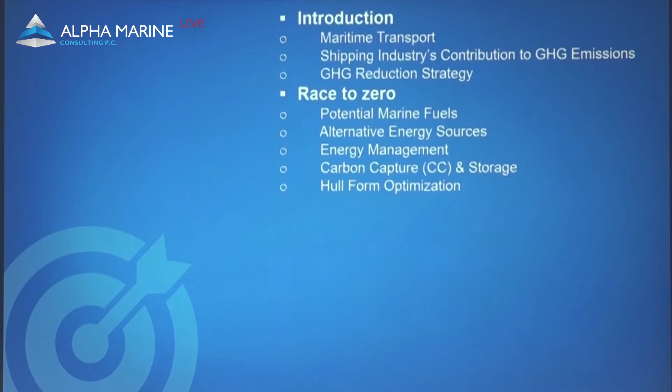Ladies and gentlemen, I would like to thank you also very much for attending this presentation. As Mr. Yerasimou already explained, today we are going to discuss the importance of the maritime industry, its contribution to greenhouse gas emissions, and all available and emerging decarbonization technologies. A striking example of this is the feasibility study on an Aframax tanker, on which we implemented different decarbonization technologies with the main aim to assist the ship owner to prepare for the upcoming regulations. The results and the case study itself will be further analyzed by Dr. Wu from University of Birmingham.

Without doubt, the shipping industry is the backbone of the global economy. For the maritime industry, this is not just a moment of change, it's a time of transformation. Never have the decisions we face been so complex, and never have the consequences mattered more. We all have to be united under the common goal of a carbon neutral tomorrow. However, to get there, decisions from vessel design to fuel choice need to be taken today, while cross-sector regulations and international collaborations will enable us to shape a brighter future.

It's not about ensuring future compliance or competitiveness. It's bigger than that. It's about shaping the future for the maritime industry, for our people, and for the world we are living in.

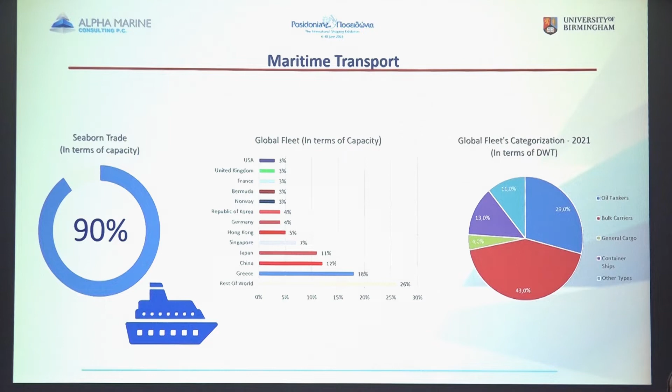And at the same time you can see on the right diagram that bulk carriers and oil tankers represent about 7 out of 10 vessels globally. Also, LNG carriers and container vessels are a very promising and booming sector. The last decade, shipping industry has been developed approximately by 67% and 3% compared to 2020.

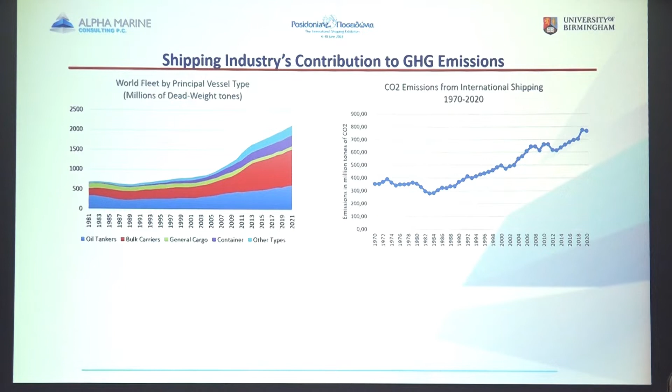That means that as the shipping industry development increases, it generates increasing emissions. And this can be clearly seen on the right diagram again, where shipping industry emitted about 762 million tons of CO2 in 2020. Nowadays, shipping accounts for approximately 2.2% of global greenhouse gas emissions, and these emissions are expected to increase further by 51% in 2050.

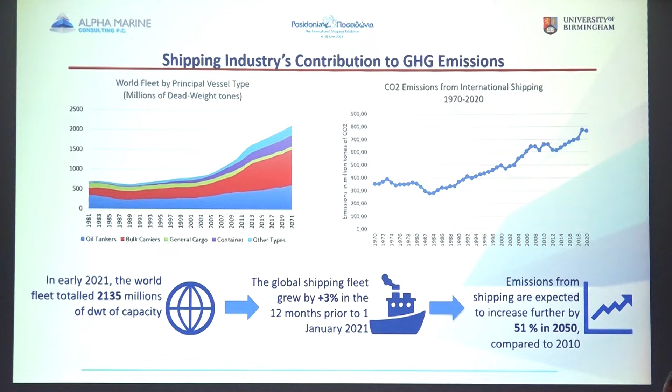It doesn't matter if we want an iPhone coming from China or a coffee from Mexico, or even to just tow an iceberg to Glasgow. At the end of the day, we all depend fundamentally on the shipping industry. And this just underscores the importance of decarbonizing the shipping sector.

Now, let's find out which technology or fuel could drive shipping emissions to zero. This is the question of this age, and for sure the question of the next decade. Deciding on the most appropriate solution depends on understanding the vessel's operation, safety of carriage, handling and storage, and availability at ports globally. At the same time, we need to ensure that we can deliver to the shipping industry a safe, scalable, and commercially viable solution.

There are several ways with which we can achieve high efficiency and compliance for our vessel. You can either switch to low carbon or zero carbon fuels. You can use technologies utilizing alternative energy sources like wind, sun. You can install a carbon capture storage technology, which is still under development. And of course, you can choose technologies that could potentially optimize the hull performance and the energy management of the vessel.

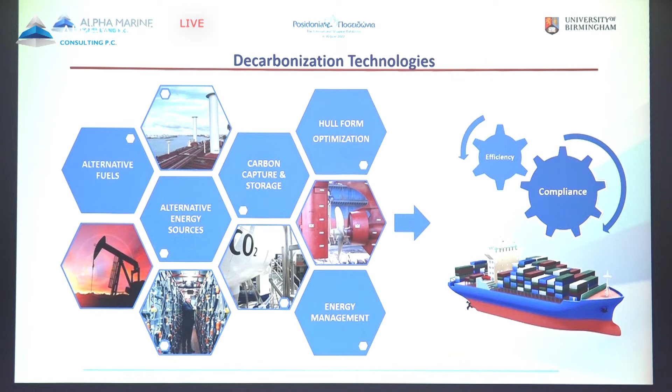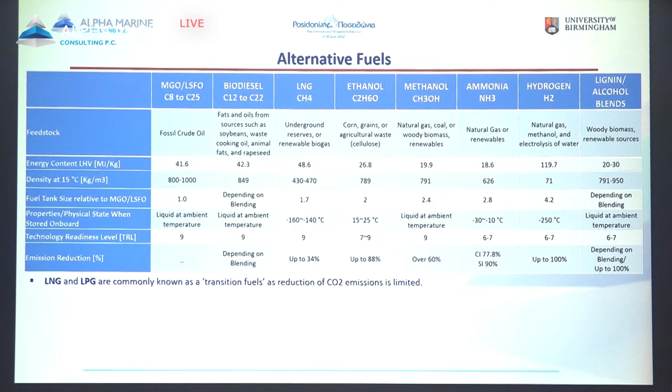So, firstly, we would like to give you an overview of the most important alternative fuels. LNG and LPG are commonly known as transitional fuels nowadays, since the reduction in carbon dioxide emissions is limited. We can achieve up to 100% reduction in greenhouse gas emissions when ammonia, hydrogen, and methanol are used in thermal engines or fuel cells.

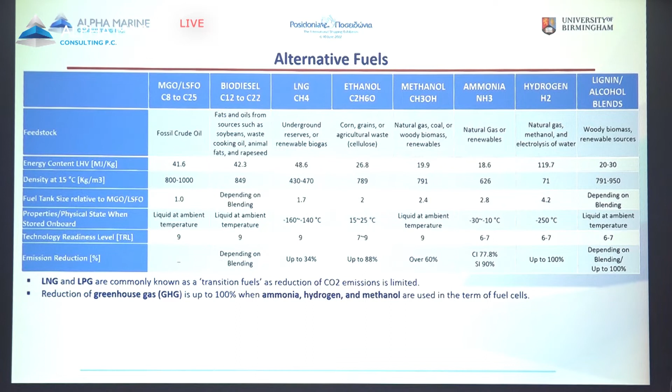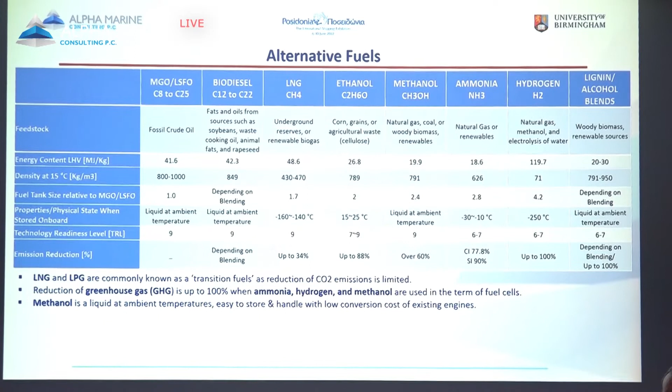Methanol is a liquid almost similar to the conventional marine fuels, which can be easily stored and handled on board. It has potential, however, it needs more space in the market, and we need to accelerate this solution. Limited by the storage standards, hydrogen and ammonia are not commercially available alternative fuels, but with high potential.

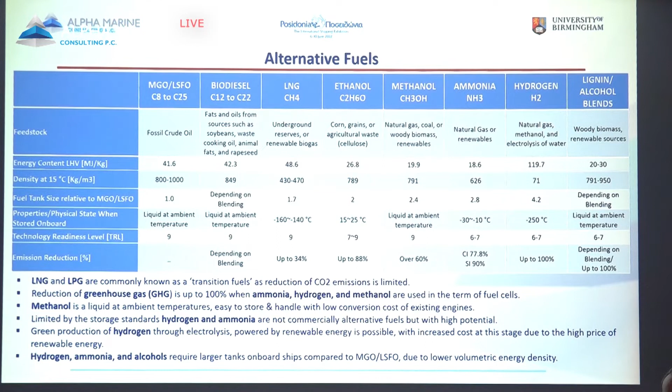Green production of hydrogen through electrolysis, powered by renewable energy, is possible, however with increased cost at this stage due to the high price of electricity coming from renewables. Lastly, hydrogen, ammonia, and alcohols require larger tanks compared to conventional marine fuels.

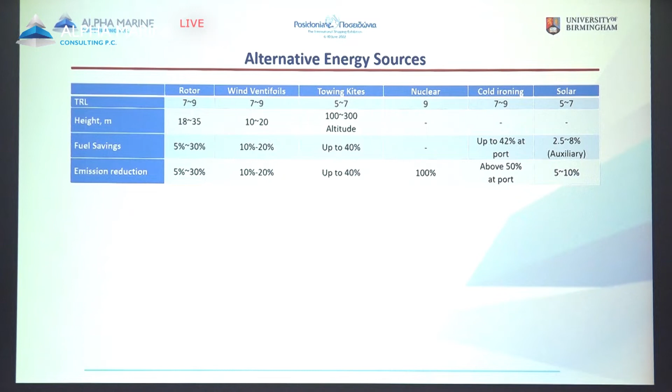Secondly, let's focus on the group of technologies utilizing alternative energy sources. Rotors, wind ventifoils, towing kites are some of the technologies using the wind, having very high TRL level. However, the reduction in the fuel consumption and in the emissions depends on the vessel type, the size of the installed equipment, and the operations.

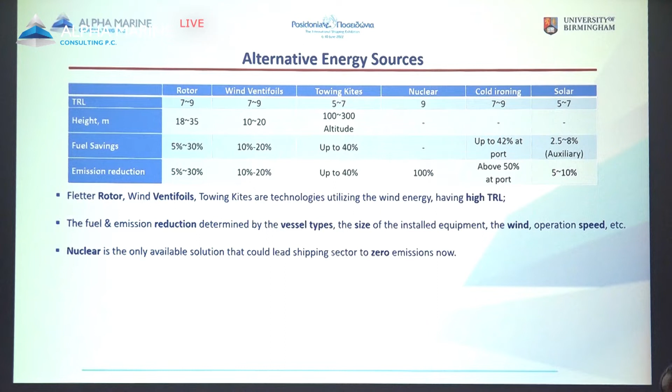Nuclear is nowadays the only solution that could lead the shipping sector to a carbon neutral future. However, radioactive waste disposal, and accidental release of radioactivity are the main reasons why nuclear power has not yet been adopted in the maritime industry, especially in commercial merchant vessels.

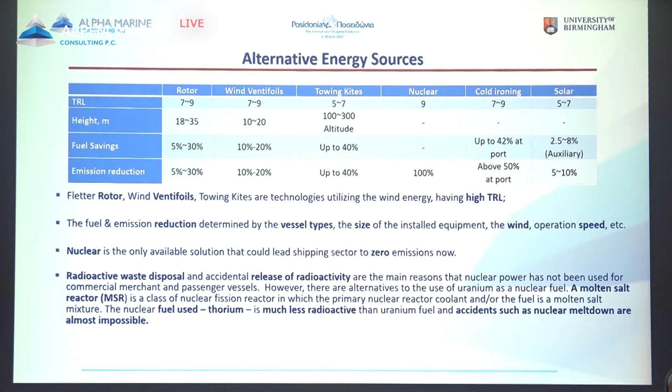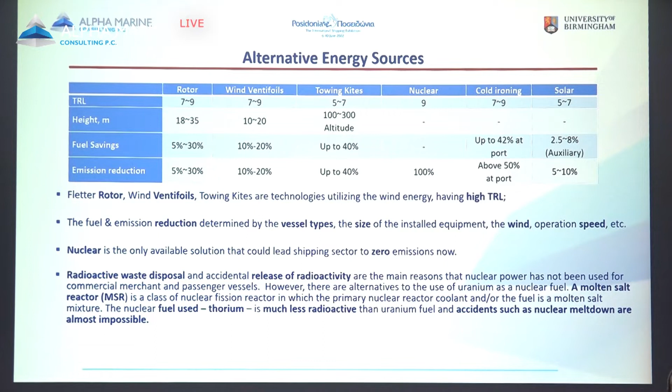Of course, there are alternative solutions instead of using uranium as a nuclear fuel, and this is a molten salt reactor, which uses a fuel that is much less radioactive, and accidents such as nuclear meltdown are almost impossible.

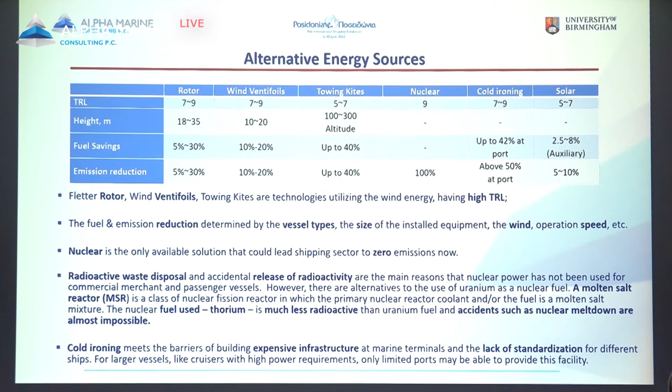Cold ironing is another promising solution. However, the expensive infrastructure and the lack of standardization are some of the main disadvantages. For larger vessels like cruise ships that require high hotel loads, only limited ports can provide this facility.

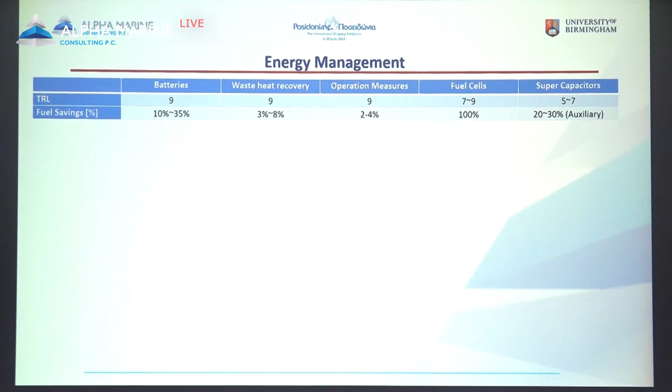Then let's consider another group of technologies that aim to optimize the energy management of the vessel. Batteries can potentially reduce fuel consumption and emissions on board a vessel. However, the increased cost and the complexity of the system are the main disadvantages.

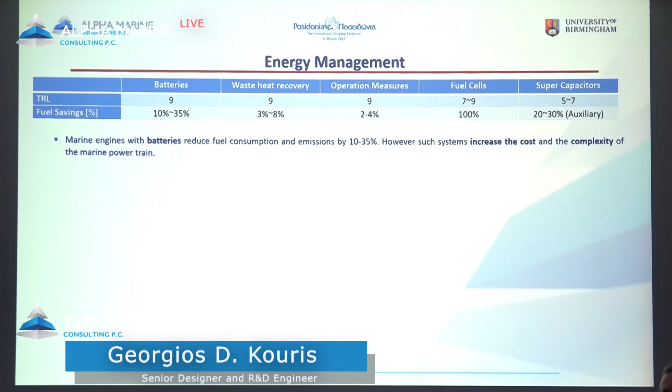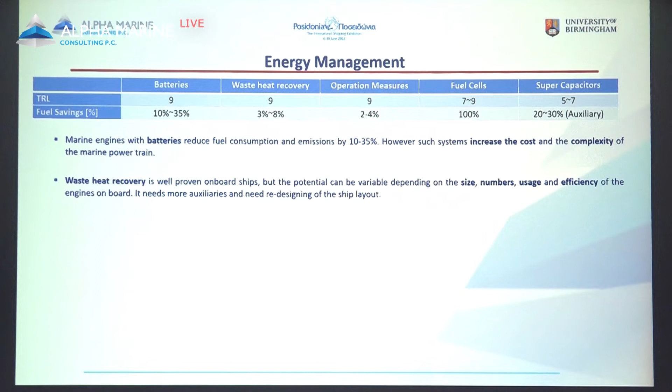Waste heat recovery is also another solution well proven nowadays on board vessels. However, the usage of this solution in the maritime industry depends on the different size, numbers of engines, and the efficiency, of course.

Operating at a low speed, slow steaming, optimizing the route and the trim of the vessel are some of the operational measures that could lead to fuel savings and reduction on emission. However, this solution cannot lead the shipping industry in the decarbonization.

Fuel cells, when powered by hydrogen, are fully renewable and can provide clean power. However, in this solution we have problems like availability of hydrogen fuel, and of course we need to increase further the manufacture of fuel cells.

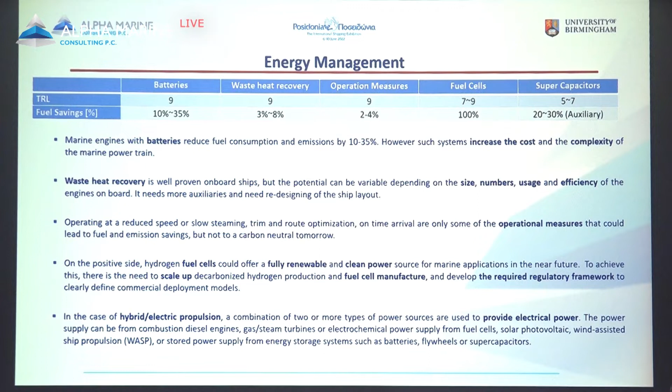At the end of the day, we can also end up with hybrid and electric propulsion configuration in order to provide electrical power for our vessels. In this solution, we can combine combustion diesel engines, gas steam turbines, electrochemical power supply from fuel cells, for example, and wind assisted propulsion. Or even energy storage devices like flywheels and supercapacitors.

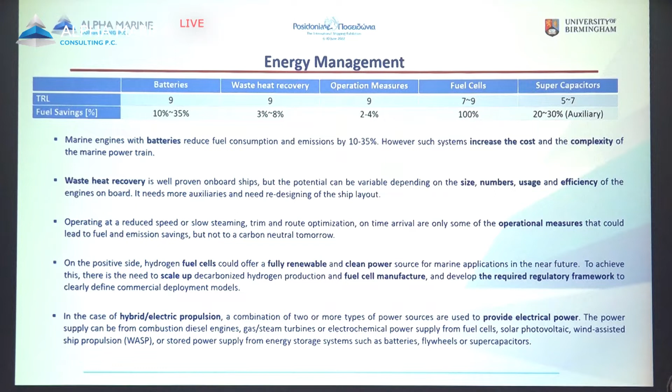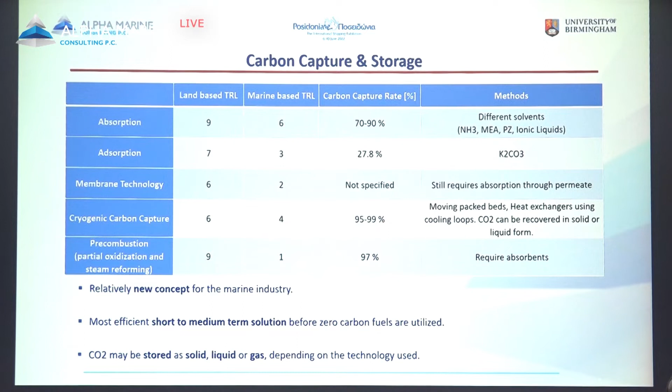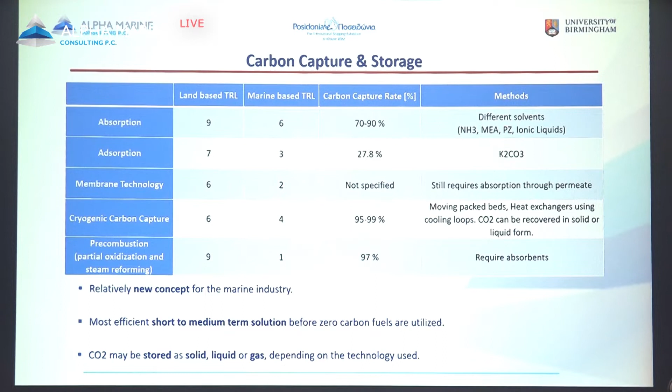So, last but not least, I would like to discuss technologies that aim to capture the carbon dioxide on board the vessels. These technologies have low TRL level for maritime applications. It's a new concept for the maritime industry and can be considered as a short, medium-term solution that will meet the upcoming regulations and requirements until zero carbon emission fuels can be utilized for the shipping sector. And of course, with carbon capture technology, the carbon dioxide emissions can be stored as solid, liquid, or gas, depending on the technology used.

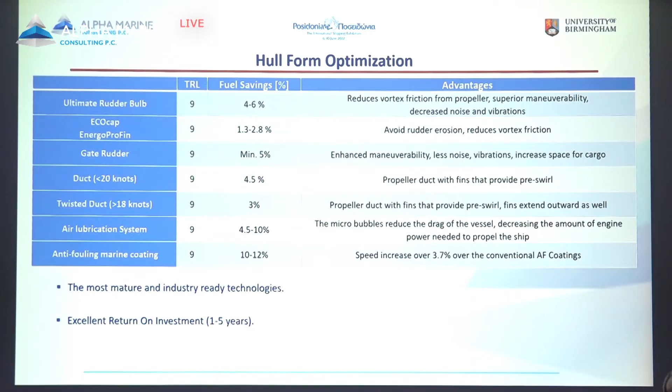Finally, let's deal with the technologies that aim to optimize the hull performance of the vessel. These technologies have a high TRL level, are already implemented in maritime industry, can have excellent return on investment for the ship owners, and of course we can achieve potential savings.

Now, to sum up, I would like to go back again to the question, which solution do you think will drive shipping emissions to zero? The simple fact is that at this stage, and as we stand now, there is no silver bullet or immediate answer. The solution lies in a range of technologies working together. And this is what Alpha Marine Consulting has proved during this study in collaboration with University of Birmingham, the results of which will be further analyzed by Dr. Wu.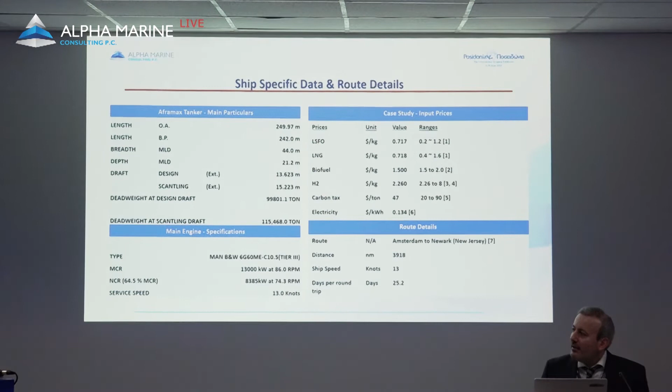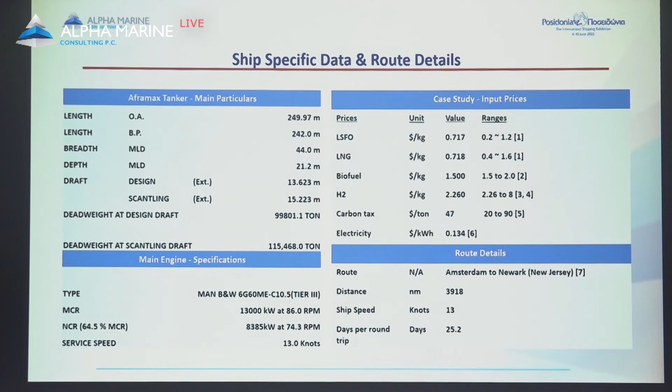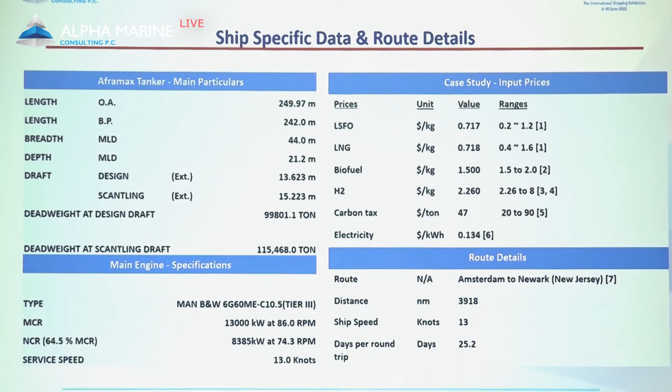So this is the ship specifications. You can see the length 250 meters and then the breadth 44 meters. That you know very well. And the deadweight is 115,000 tons. And the engine you must be very familiar with, that's a MAN engine, and the MCR is about 13,000 kilowatts, and there are also 3 auxiliary engines, and the design speed of this vessel is 13 knots.

And we have lots of inputs into this case study, especially the price. You can see the price for LSFO and the LNG over there. The price currently is very volatile. So we decided to apply a very large range to do the sensitivity analysis. So you can see the LSFO up to actually 1,200 US dollars per ton. And the LNG actually goes up to 1,600 US dollars per ton. That's the price after the war. And we understand the biofuel is also very expensive, so we apply quite a large range on it.

Pounds per kilogram, so which is still very, very expensive - that's from renewable energy, so still very expensive. The carbon tax we apply here is 47, based on the April 2021 data from the EU.

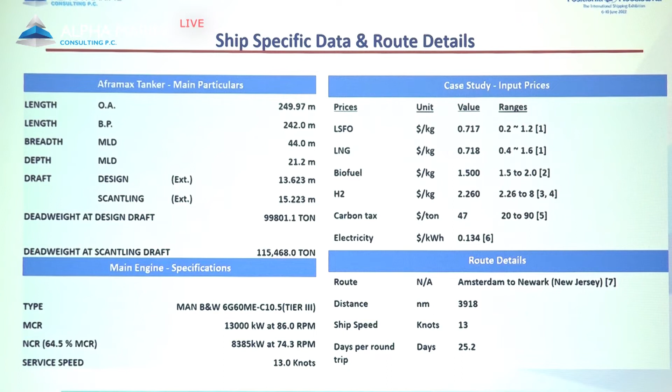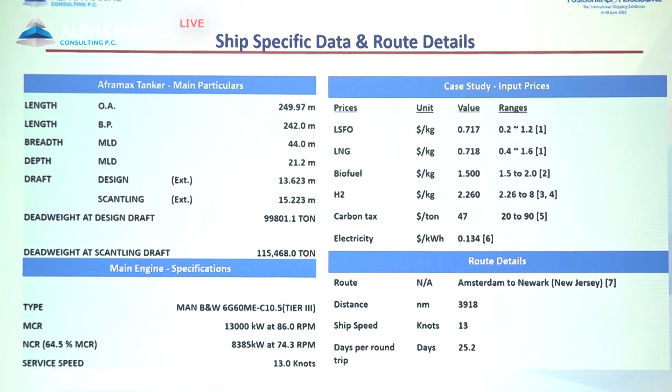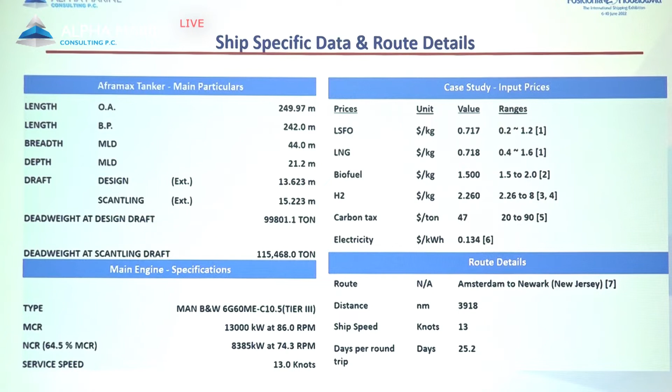About routes, we understand obviously the tanker can go anywhere, but we just want to make a particular case, which is from Amsterdam to Newark. So we look into the operational data, we understand the distance of this voyage, and we apply the ship speed of 13 knots on it. The average travel day of each trip is about 25 days, so roughly this ship traveling on sea is about 230 days a year, and the rest of the time, about 130 days, which is staying at port doing the cargo operating or just waiting. Very detailed information about this.

Then we look into the configuration. George already did a very comprehensive review of what kind of technology we can apply onto the system. But if we really look into all those technologies, the question is, does the system need to be so complicated?

If we look into this system, we can apply lots of different decarbonization technology into it. For example, you can apply a dual fuel engine, you can apply biofuel into your main engine. For the auxiliary engine side, the hotel load side, you can do battery, you can apply fuel cell. You also can have some load that could help you reduce the fuel cost. For example, you can install a Flettner rotor, which will use some electricity from your auxiliary engine side, but it will help the propulsion side a lot.

And also you can apply air lubrication - again it will consume some electricity from your auxiliary engine, but it will reduce the friction, so help reduce the fuel cost on your propulsion engine side. You can see a very complicated system here - that is carbon capture and storage, which is a very hot topic, lots of people talking about it at the moment, so we also look into that. But is the whole system necessary to be as complicated as that?

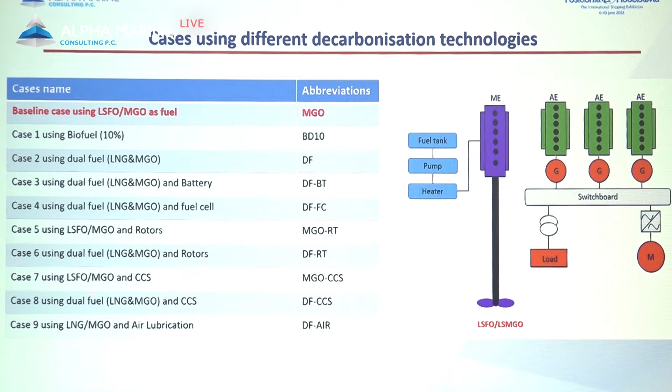Then the last 3 cases - case 7 and case 8 - we're talking about some technology for the future. The first one is we use CCS, carbon capture and storage, with a diesel engine. Then case 8 is CCS going with a dual fuel engine, so we could understand how much carbon we can capture on the vessel. The last one is a dual fuel engine with air lubrication, which is also available on the market.

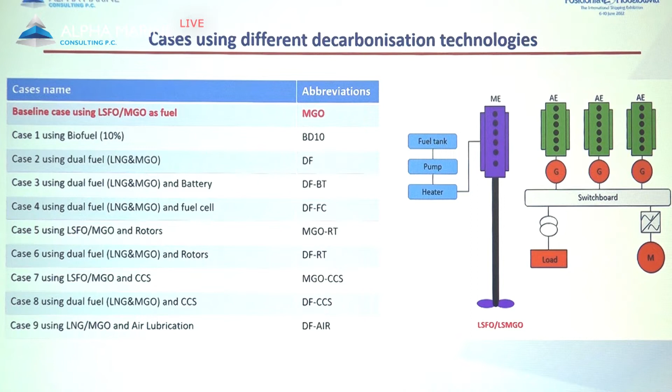Okay, let's have a look at the detailed cases. I'm trying not to overwhelm you with detailed information, but we can look into this base case.

The thing we can understand is about 80%. I have to say one thing beforehand: this is the CapEx, but it's only about the powertrain system. So it's not including the shipbuilding, everything else. It's just about the powertrain — everything that generates power for propulsion or for auxiliary purposes. We include that in this CapEx, not everything.

The main engine and auxiliary engine in total take about 80% of the CapEx of this tanker, and the fuel storage tank takes about 14%. If you keep those numbers in mind, then we move on to look at how the other cases compare with the baseline one.

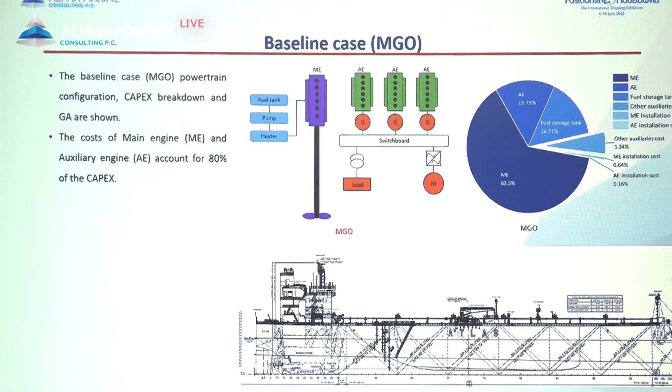Then move on to the next one, the dual fuel case. Interestingly, in the dual fuel case you can see the fuel storage tank cost overtakes the auxiliary engine and becomes the second place — so you need to make some investment there. Looking at the GA, AMC has already designed this kind of LNG-ready ship, so you can see where to put the LNG storage tank on board.

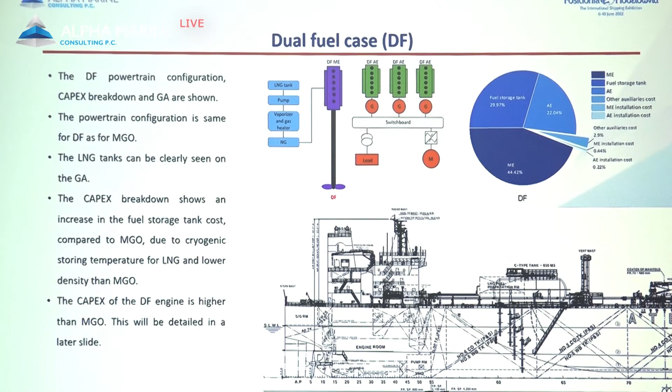Okay, the next one — we're looking at involving a battery in this powertrain. We cannot install too big a battery; we're only trying to use the battery to help with cargo operations. So this battery is about...

16,960 kilowatt hours. To give you a more familiar idea: at peak time it can generate about 1,800 kilowatts of power to help, but that power won't last long because the energy stored in the battery is limited — you can sustain that peak power for about 9 hours.

Obviously, cargo operation at port is probably more than 2,000 kilowatts, so you won't only use the battery to serve that purpose. You'll obviously have the engine working for that base power demand, and the battery helps the auxiliary engine during cargo operation.

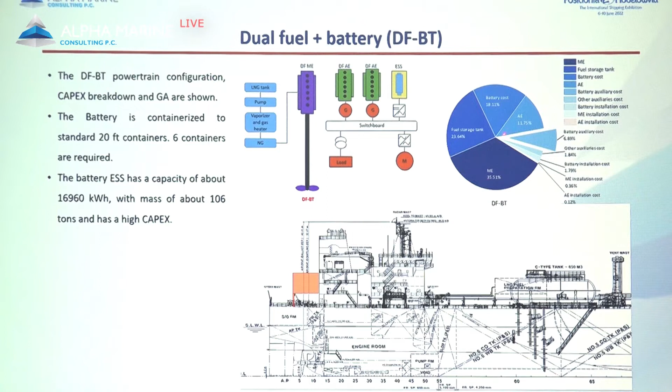But even in that case, the battery takes a lot of space — about 6 container sizes to deliver that job, and its weight is 106 tons. Looking into the CapEx table, the battery cost takes almost 20% of the powertrain, apart from the marine engine and the auxiliary engine. So let's look into the other case about the fuel cell.

So for the fuel cell, we apply something very similar to an engine — about 800 kilowatt output, so basically it works as the auxiliary engine. The difference between fuel cell technology and the auxiliary engine is that the fuel cell cannot respond to demand very quickly. If you want to increase the power output from the fuel cell, you're talking about a couple minutes delay at least. But in terms of size and volume, the fuel cell is much smaller compared to the battery bank.

So if you need this 800 kilowatt fuel cell on board, you only need 1 container size, which you can put here to support your whole system. And there's a downside of using the fuel cell, which is the hydrogen storage — the hydrogen storage tank is currently very, very expensive.

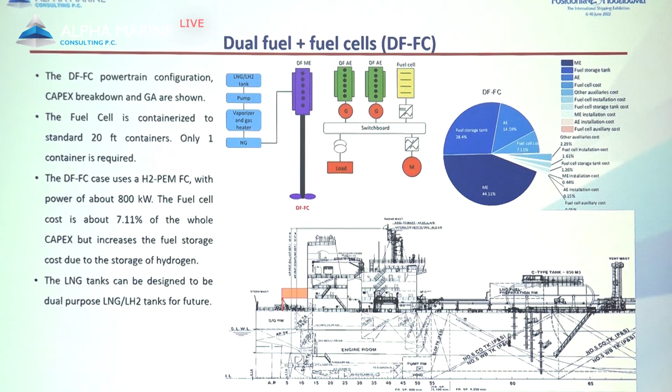We have some cost figures in the later slides. So even though you only supply this one fuel cell at about 800 kilowatts, you're still talking about major investment into your fuel storage tank. Then you can see your fuel storage tank CapEx increase to almost 30%, close to it.

Okay, the next one is using the rotor alongside the powertrain system. In this case, we install 2 Flettner rotors onto the deck.

Obviously, this is the diesel engine, so potentially we don't have the LNG tank on the deck. So we can even install 3 rotors on the vessel, which can contribute more to the decarbonization. But we want to compare the diesel case with the LNG case, so we still install 2. Remember that for the LNG case, we have the storage tank on board.

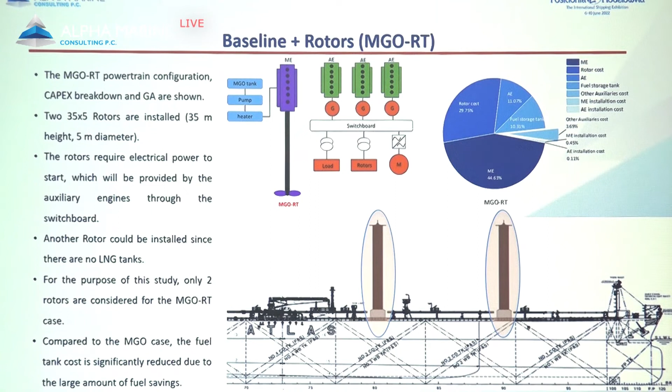Looking at this case, you will find that you can install 2, 35-meter tall and 5-meter diameter rotors onto your deck. Looking into the cost, it's not cheap, it takes quite a lot, 30%. But this is the relative value, just broken down to the percentage. If you look in the next slide at the absolute value, it's still a decent investment after our research. This is the 2-rotor case without the LNG tank.

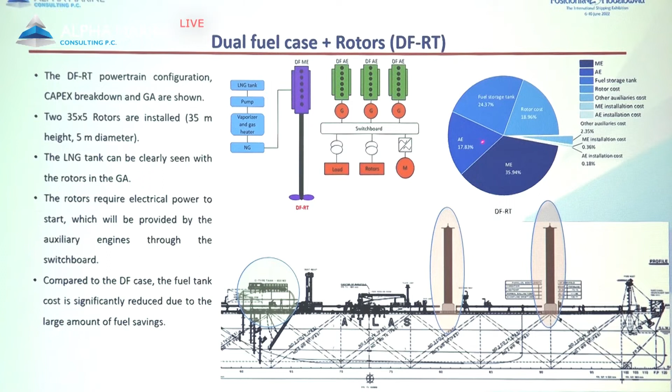The next one is the LNG tank with the 2 rotors. Very similar setup, the only thing is this is the LNG engine, so the cost and the LNG storage tank will take some share from this capex pie.

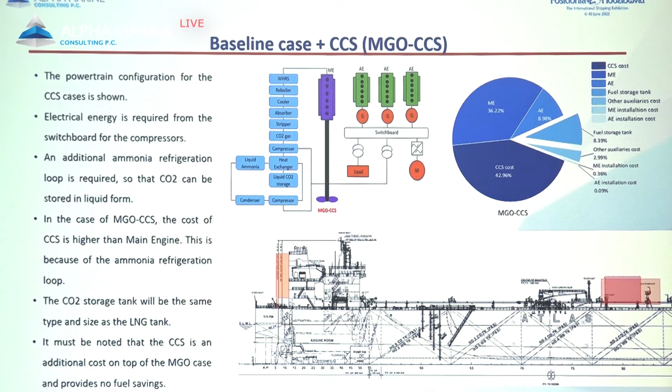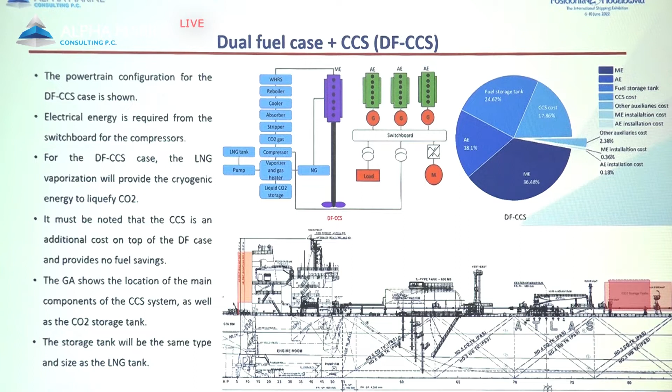But if you go to the next case, which is the dual fuel case, you would be able to use the cryogenic energy from the liquefied natural gas, because when you use LNG you need to evaporate it, so lots of cryogenic energy will be released.

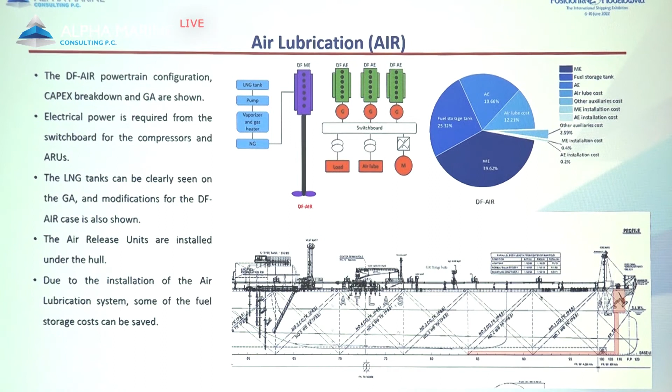Okay, I hope I haven't overwhelmed you with all this boring technology. Let's go for the cost, which I think is what you're really interested about.

Let's look into the CapEx comparison of all these powertrain designs. We tried to hide the supplier information, so we normalized the cost. The MGO is the baseline case, we just make it unit one. So the rest of the cases will all have a higher cost compared to the baseline, which is quite easy to understand.

The BD10, which is the biofuel case, you just need to slightly increase your cost. But we'll understand later that your fuel cost will dramatically increase due to the biofuel supply and cost.

The other information you can get from this diagram is like the battery and the fuel cell. You're talking about very high cost adding this system onto your powertrain, although it won't take too much share of your auxiliary power. So there's lots of things you can see.

In terms of the rotor, the investment is moderate, but we will find later if it brings any benefit for your fuel cost and other costs as well.

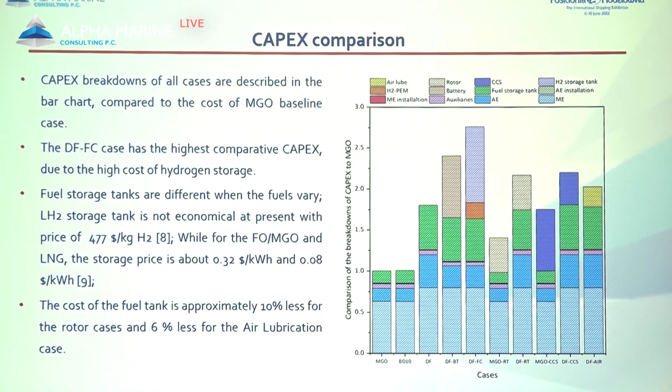Okay, let's look at the next one. This is the total cost. When you're adding the fuel cost on top of the CapEx, everything, you will see the cost over 25 years just soar up to a very high level. Looking at these two rotor cases, you'll understand that the rotor really helps you a lot in terms of cost saving over 25 years.

And these red bits, they are REPLEX. So when you're using battery or CCS, you're talking about not only the initial investment, you're also talking about some replace cost during the lifespan of your vessel. So this also needs to be considered.

On the left-hand side, this diagram shows you that currently there's no carbon tax applied yet. So when thinking about the carbon tax on top of the current total cost over 25 years, you will see those red-orange bits on top of it. The size of this carbon tax column depends on how much carbon dioxide emission comes from your system. Again, the two rotor case gives you a very good total cost over 25 years.

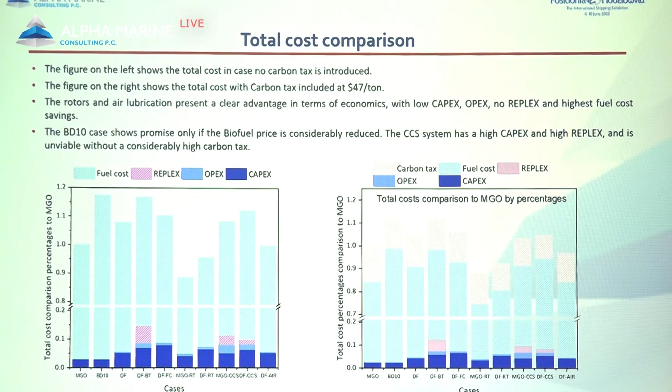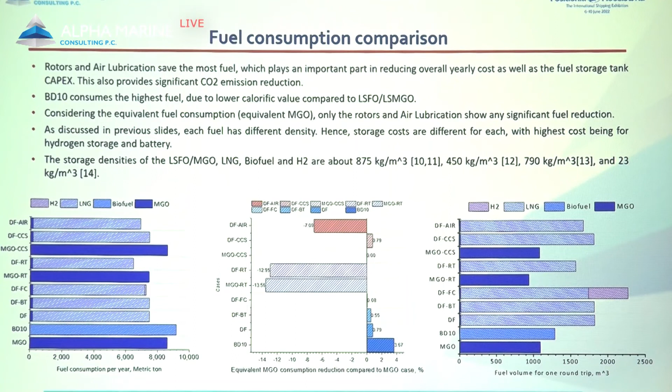This gives you some information, but not really complete, because the density and heating value of those fuels are not exactly the same. For example, hydrogen is very light, so you only see a very small bit here. But we need to look at the other side of this information.

So we do the equivalent MGO consumption - we convert all the fuel consumption into MGO. Then we can understand very well which case saves a lot of fuel cost. On this side, we find two rotors really save a lot of cost, and the air lubrication also helps us save. But the rest of the cases, like biofuel, actually show an increase.

On the right-hand side, you have the fuel volume for one round trip information - that's also crucial information. The hydrogen I'm talking about takes a lot of space, so when you're looking at the volume of your fuel tank, that will increase a lot.

Okay, then it's the payback period and the levelized cost of electricity - two criteria that help you judge which one gives the best economic viability. On the left-hand side, the baseline, you're talking about 8 years for the payback of this powertrain system, not the whole ship. But when you look at other systems with added technology, you'll just prolong the payback period a little, not too much. But when using battery technology or biofuel, you're potentially looking at very long payback periods.

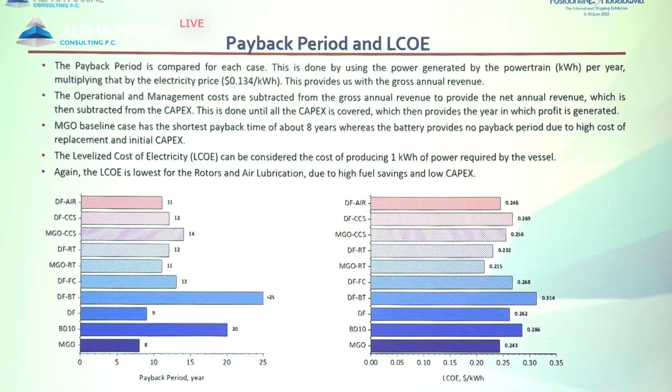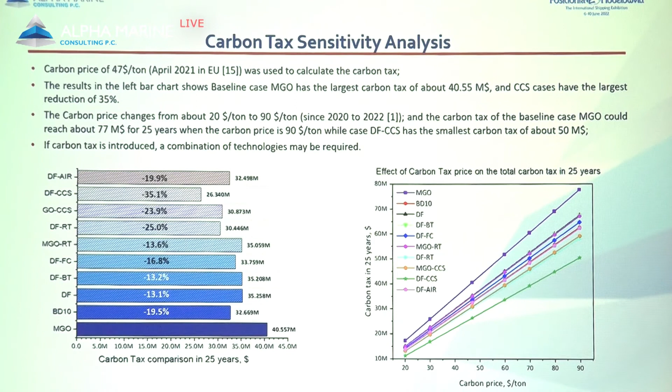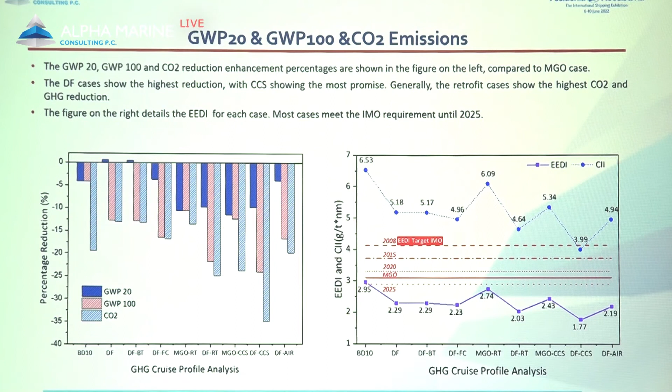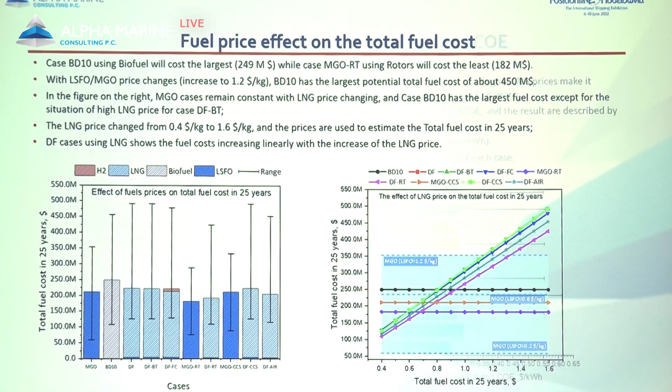Okay, so I think I probably skipped a couple slides to reach our conclusion. So the message we want to pass over to you is that, looking at the CO2 emissions based on different cases, most of the cases we propose here will be in compliance with the IMO's reduction strategy until 2025.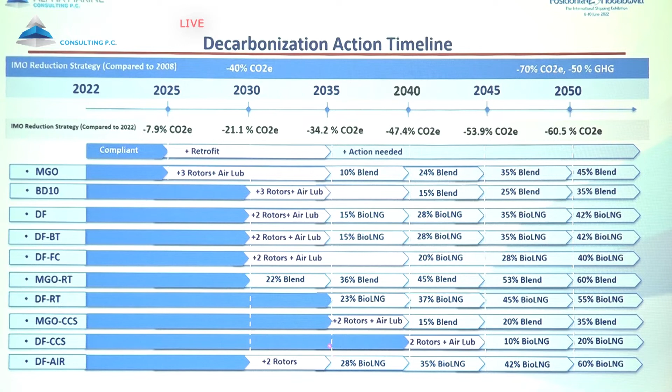But if you're not taking any action for the MGO baseline case, after that you have to do some modification on your current vessels. Other cases, like biofuel, dual fuel, or adding battery, fuel cell, or rotors, can reach 2030 - a moderate modification that allows you to extend compliance until that time. Then CCS obviously shows very good compliance with the IMO strategy, but the problem is that the cost is really, really high.

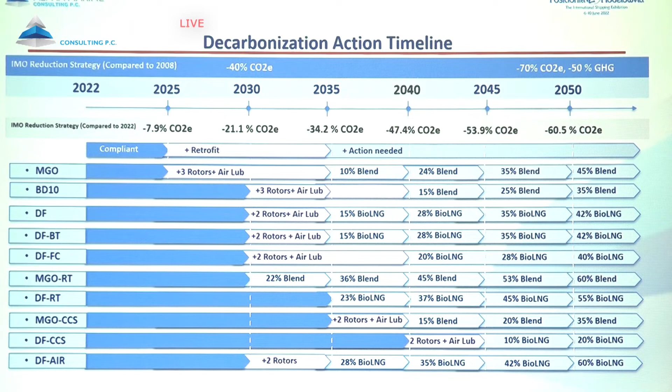Let's just conclude our slides. Firstly, the baseline case will not be in compliance with the IMO strategy as early as 2025. The dual fuel case achieves carbon reduction which follows the IMO strategy towards 2030, even without any add-on technologies. After 2030, you can obviously add more technology onto it to ensure a major carbon reduction.

We find that rotors are a very good option with quite short payback periods and achieve very good CO2 reduction effect. The battery and fuel cell option doesn't look like an immediate solution - it's too expensive, and their carbon reduction is moderate, not major at all.

If the IMO 2050 targets are to be met, several CO2 reduction technologies have to be used in tandem - meaning you need to apply modification firstly, then keep doing moderate modification, then finally follow this IMO reduction strategy. So that's the major finding from our study.

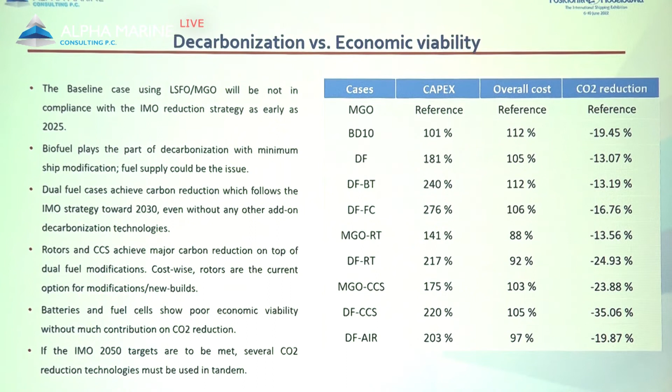Sorry, I just have a very quick last couple slides. Based on this case study, we developed a decision-making tool to let you understand if applying certain modifications to your vessel can bring it into compliance with the IMO strategy. We have a very well-organized structure already.

Initially, we put performance information into our simulation. Then the simulation output goes into Power BI, which is a data source and data treatment software. Again, with the ship operation data, we can generate visualizations to let you understand information very quickly - for example, the ship system's performance, how much CO2 emission, and how much fuel it will consume.

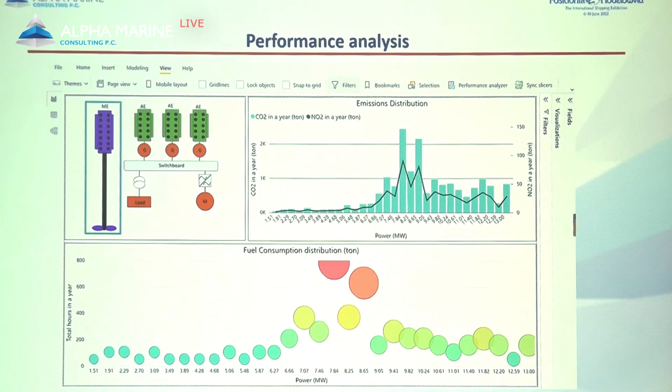You can also try to predict the cost effectiveness of your new technology - what's the CapEx breakdown, what's the payback period, and what's the fuel cost over 25 years.

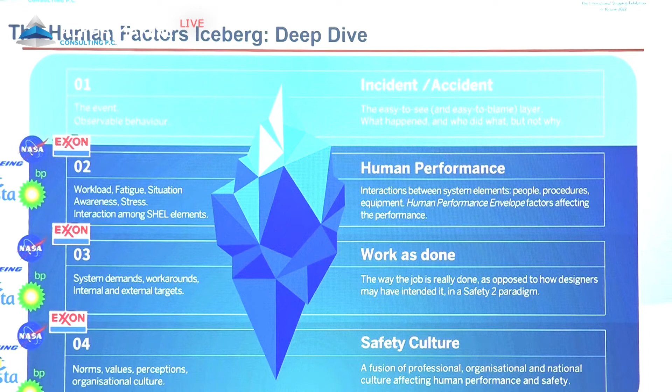Initially, especially in the Boeing case, the failure was attributed to the people. Of course, that was scapegoating and blame culture. And when we looked deeper at all these companies, we saw that the truth lay beneath the surface. It was not as simple as somebody being incompetent and failing. It was far more complex.

And what have we found, guess what? See how many keywords here. The NASA disaster actually had a lot to do with culture. There was a lot of politicization, multiple projects that they had to run, tight deadlines. They felt safe that they knew what they were doing. They had what we call a groupthink mentality.

So everybody was deciding in the direction that they desired; they wanted to deliver. Nobody was eager to be the unpleasant guy. This is groupthink, and you will see it. We have exactly the same problem in other failures as well, in BP as well.

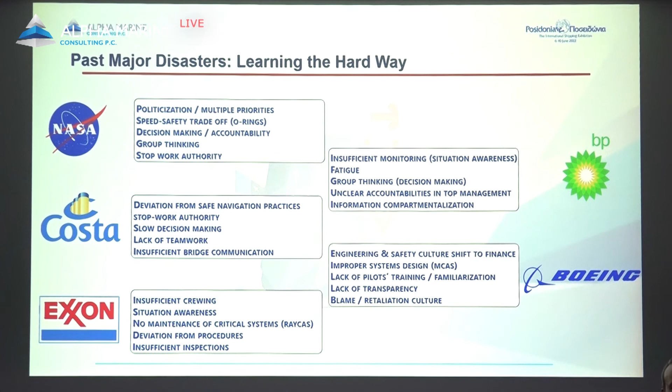Costa Concordia: people on board lacked teamwork and situation awareness, many problems that relate directly to behavioral competencies. Exxon Valdez: insufficient crewing, bad maintenance of critical components, so the RAYCAS radar was not functioning. Exxon was to blame, and many other things. Now, all these things that you see here were lurking behind for a substantial amount of time. They were not present for just some hours or a day. They were there for months.

Now, the question that we usually pose to shipping companies is, how are you sure that under your surface, under your iceberg, these things are not lurking? The answer is that we are not. Okay, and that's why the industry tries to make us look deep inside and find out, because these variables lurk behind our companies as well.

The big question here is, are we similar to these companies? Do we share similarities? The answer is yes. As with the companies that I have just described to you, we operate in highly competitive commercial environments. So we have a lot of commercial pressures, conflicting priorities, hierarchical management systems, skilled employees that have their own career paths and their own priorities within our cultures. We are strictly regulated, and we have similar technologies and obstacles to pass. So we are very, very similar.

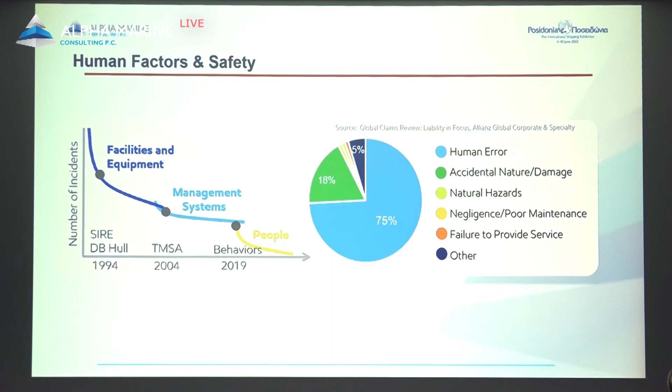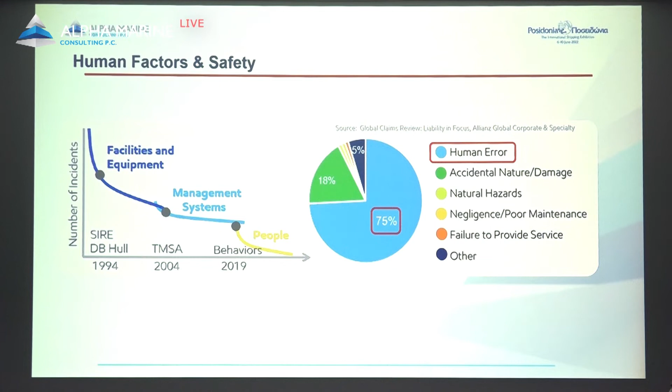The industry helps us a lot, and we already have a lot of frameworks and guidance that drives us towards this direction. We have Intertanko, OCIMF, Dry BMS, RightShip, that have published all these very good tools that we need to understand and assimilate. But before we go to how to, we need to understand the basic principles that underlie these frameworks, the mentality that lies beneath. And of course, that mentality has to do with the incidents that we've seen. We have learned the hard way. So we have some specific facts that we have derived over the years.

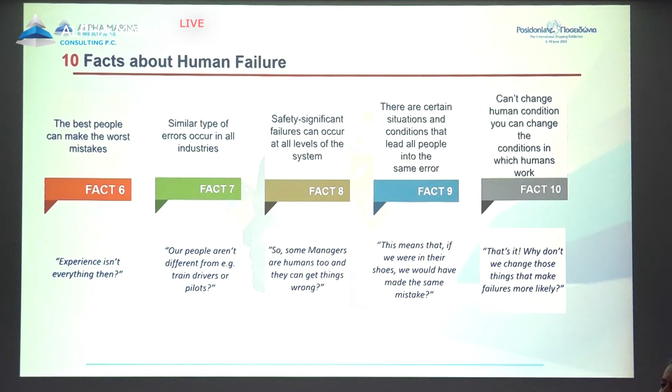The last one, and I think the most important: we cannot change the human condition, we cannot change the human brain, but we can change the conditions in which humans work. This is where we can interfere, and this is where we can make things better. And I know that it sounds complicated, but trust me, it's not. It works, and we can do it. We have designed and we know how to show you and show the industry how to achieve this target.

Now, if we take all these 10 facts and try to have these simple rules, keep them as a tool in your mind, because if you have these simple rules and you manage a department or a company, immediately you look towards the right direction in improving your human factors, the people and the conditions that they work in. So, number one, if we take all these facts and make some 5 principles, you will see that we need to understand that error is normal. It's a part of the system.

Okay, people are dynamic creatures. The systems that we need to operate are dynamic. There is absolutely no way that we can control it 100%. So, if we cannot control it, we need to manage it. We need to have barriers. We need to increase the skills in order to create buffers and obstacles that stop errors from developing into crisis. So error is normal. Everybody will make a mistake. We need to go away from blaming people.

Okay? One of the biggest mistakes that we make when we have these very small errors or small failures within our companies is that we blame people. It's your fault. Get out of here. You will lose your job or something like that. This is absolutely wrong because it creates a very wrong culture where people are not open to contribute, to speak, to help us improve. Learning and improving is vital.

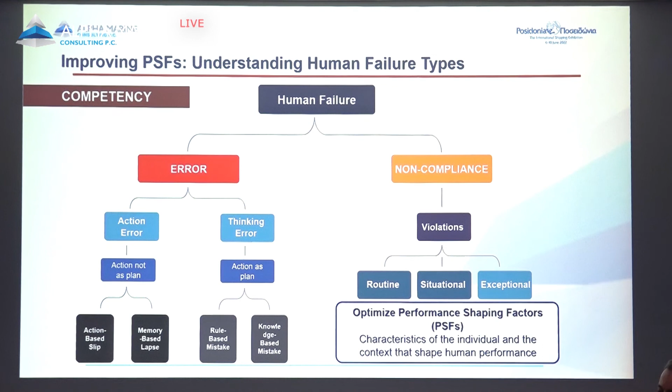If you understand the actions, the performance shaping factors will be adapted accordingly. So I know, for example, that I need to develop a checklist because people make action errors—they omit things because they need to remember, for example.

On the learning part, if I have all these human factor KPIs in a coherent manner, and I measure and target them correctly—and I told you that the Deadly Dozen is a very good starting point—I will develop leading indicators.

Leading indicators will help me predict. So whenever I see these human factor KPIs, these performance shaping factors, rise in a bad way, this will alarm me, meaning I need to take action before I have a problem, before a lagging indicator goes up. LTIF, for example, is one of these things.

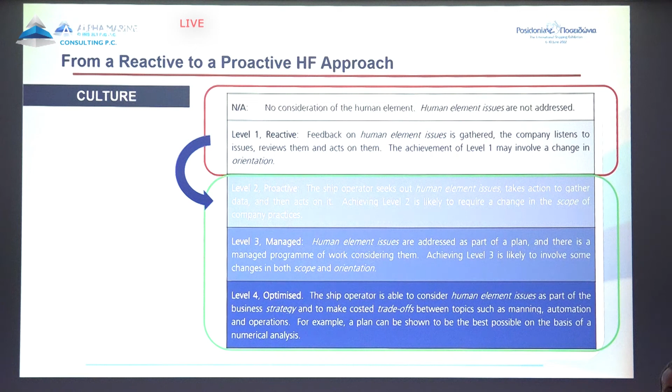The whole bet is that by using all this, we move from the reactive position that we are currently at towards level 2, 3, and hopefully level 4, with a proactive culture. We need to ensure that we tackle and fix things before they happen. And this is the way to do it.

Now, to close the seminar today, we have seen how important new technologies are and how they have made shipping greener and safer, and they will continue to do so. However, it's not the vessel, it's human performance. People—until vessels become fully automatic—will remain part of the system.

So as long as humans are part of the system, the variability they introduce will cause problems. Humans remain the main drivers of performance, even in the age of increased automation.

So number two, technology is part of the answer, but it's not the solution. We can have automation, the best vessels, perfect radars, we can have everything. However, if human competency, the humans on board, are not capable, or cannot function because the system or context is very bad, errors and failures will occur. So we need to understand how to combine them.

Keep in mind that from the introduction of electronic radars, ECDIS, and so on and so forth on board, this had an effect on the new age seafarers, and they don't have external situation awareness as they used to have in the old generations. So automation and systems are not always the cure. They have some drawbacks as well that we need to understand and tackle. People need to be trained to have external situational awareness as well, and not simply rely on a system that may fail.

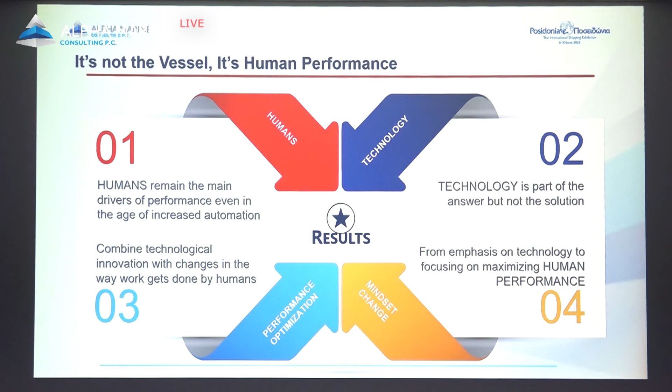Because this is what seafarers do. 90% of the vessels today will reach their destination in a safe manner. That doesn't mean that everything went well on board. However, there were humans on board that managed to tackle errors, mitigate risks, and solve problems. This is what they did, and we need to increase their capacity to do so even more.

That's all from me. Keep in mind these four rules, and we are done for today. Thank you very much.